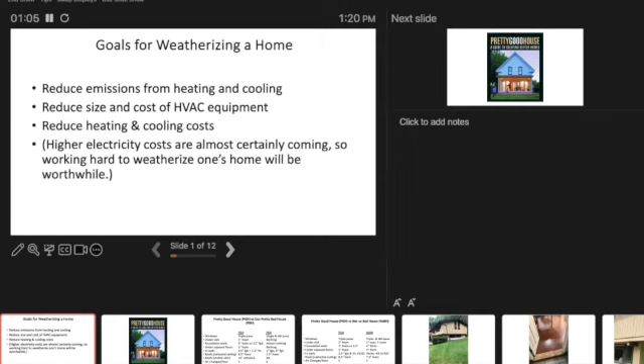If we can weatherize our home really well, before the transition from fossil fuels to electric, you reduce the size of the equipment you need and the cost of it. Great savings right there. Plus, you reduce your heating and cooling costs long term. So two really significant savings if you spend money up front to weatherize your home well. And higher electricity costs are almost certainly coming, so this is the right move.

So when I started thinking about this, I'd been following this stuff for a number of years, and I knew about the Pretty Good House group. There are builders in Maine working on finding ways to build better homes, especially with a focus on energy efficiency. They were familiar with the passive house standard, which is basically, in a strange way to say it, insulate your house so well you can heat it with a candle. I mean, it's not quite like that, but practically, they really, really insulate the house super well.

These guys and gals said, you know what, that's possible, but it gets really complicated and really expensive if you take it to that level. So if we pull back a little bit, how far back to where it stops making real sense to add insulation and put in fancy windows and so forth, how can we get almost that far for less money? So that was what I chose as my goal.

Okay, so here we've got the Pretty Good House column on the left, and then our Pretty Bad House. So they call for triple pane windows. We had all single pane on the lower level and good double panes on the upper level. Blessings on the people who left them before us. So those were good. Under the slab, nobody puts foam under slab until very recently. So of course we had nothing there.

Foundation walls, they call for 3 inches of foam or 3.5 inches of fiberglass. We had almost nothing in the foundation walls. Under exposed floors, deck houses, that's what we're in, a deck house. There's a 2-foot overhang all the way around the house. That's not insulated in deck houses. So in the wintertime, when you stand near an outside wall, your feet are cold as heck because just 3 inches below you is 0 degrees or whatever. So we had nothing, no insulation there.

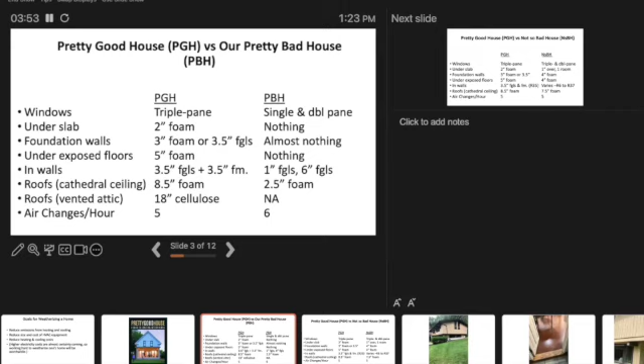Roofs call for 8.5 inches of foam in a modern home with a cathedral ceiling; we had about 2.5 inches. We don't have a vented attic, but they call for 18 inches of cellulose in that. Air changes per hour basically measures how many times an hour all the air in your house gets blown out by wind pressure and replaced, and you have to reheat it. A lot of houses are 10, 15, 20 times every hour, which is like 20 to 40% of your heating bill going out the window or through the walls. They call for 5, and we were at 6, which wasn't too bad.

So we jumped into this, and I found a really awesome guy down in Millis through a friend who'd been in this business for 40 years, and here's what he helped us do.

We got triple pane windows on the lower level and kept the double panes upstairs. Under the slab we couldn't get anything under it, but in one room we were able to do 1 inch of foam over it. Foundation walls got 4 inches of foam outside, since we were already doing drainage around the foundation. Under the exposed floors we got 4 inches of foam. In the walls it varies a lot - some walls we just couldn't access because of built-ins or bathroom tile, so some places still have the original 1 inch, but it's not much.

So we go all the way from that up to R37, where we basically meet or beat their requirement. We got 7.5 inches of foam, almost met their goal there, and brought our air changes per hour down to 5. So it really, really made a difference.

So windows - the lower level is all triple pane, upper level has good double panes. You don't see any air sealing here, but we did a lot of it. We didn't see that much change from 6 changes per hour to 5, and I think there's a reason for that inherent in the design of the deck houses, which I'm trying to do an experiment to prove. So we did as much as we could there, but air sealing is very, very important.

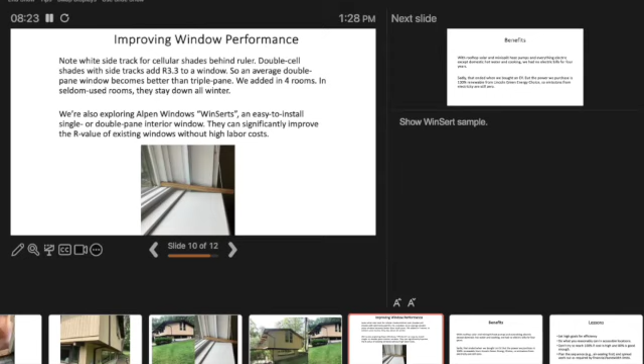Benefits: we put on rooftop solar at the same time, and put in mini split heat pumps, which are very efficient. So everything was electric except domestic hot water and cooking, and we had no electric bills for 4 years. That's a really nice benefit.

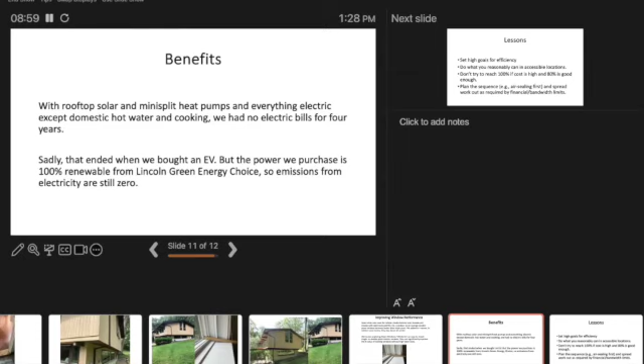Then we bought an EV, and sadly we had to pay electric bills again - it's just more than our solar collectors could handle. But the power we purchase is 100% renewable through Lincoln Green Energy Choice, so no emissions from that. Not paying any electric bills - I loved it.

Lessons: set high goals for efficiency when you're starting a process. Do what you reasonably can in accessible locations. Like I said, if you've got a wall that's tiled, you can't deal with everything from the outside - you live with that. Don't try to reach 100% if 80 or 90% is enough.

Plan the sequence carefully. Air sealing first, that's super important - if you start insulating, you've covered the areas you want to air seal and you won't be able to get to them. So air seal first, then spread out the work as required by financial and bandwidth limits.

It can go on for 10 years - you do it at your own pace. So there you have it.

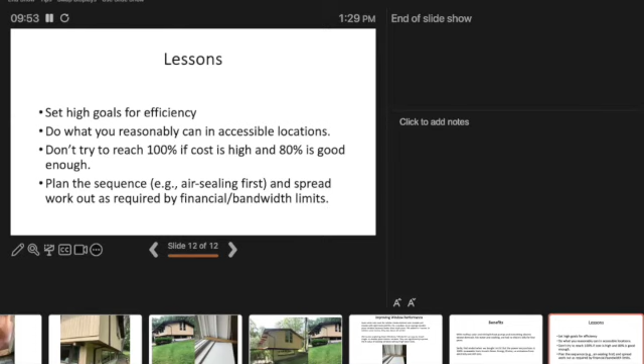I'm Tom Longnecker. I've been a Lincoln resident for 28 years. 26 years ago, I had the opportunity to move out of my mother-in-law's and build my own house in Lincoln, so I was pleased to start living in Lincoln on my own with a pretty good house, to make reference to Michael's new construction. Many of the things he said about sealing and so forth were given in my house from the start, but there were a lot of opportunities still ahead, so I'll go into those.

For us, what that meant was, of course, it was modeled after my 8th grade math class project where I designed a house, but it did have some other features. At the time I was starting a family, so we wanted to make our construction easy and meet our goals. We went with the Acorn Deck House Company because they could build a lot of the house in a factory and then bring it on site, making a really tightly sealed home, which we appreciated. It also keeps costs down and waste down - lots of benefits.

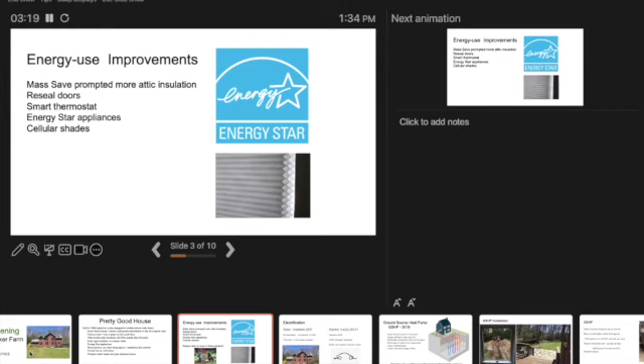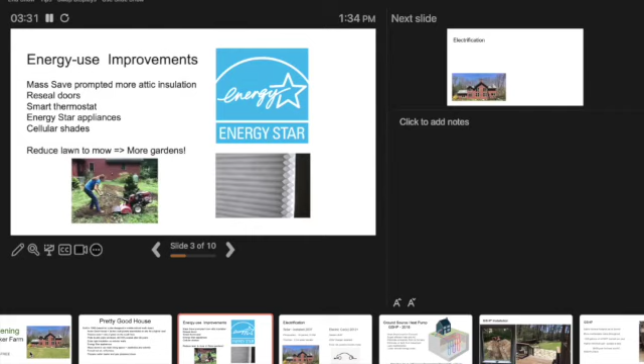And we, as one of our improvements, reduced the amount of lawn that we have to mow. So that's my wife digging up the lawn so we can put in a big garden in the back of the house instead of a lawn itself. Less mowing, we figured, was a step in the right direction.

But then we got into the serious stuff, the more expensive stuff. We realized electrification was a goal. In 2007, we installed solar. We were delighted when we did it. We got an 18-panel photovoltaic array with a capacity of 3.1 kilowatts, which for those of you who know the modern systems, that's not so impressive. But at the time, it resulted in some positives - we were not paying for electricity for a couple of years.

We also put in 3 thermal panels so that we preheated the hot water that went into our propane water heater, to reduce the amount of propane we use there. And the nice thing is they said that these systems do pay for themselves in time. So we've definitely paid for those systems, and now we're getting pretty cheap hot water and free electricity much of the time.

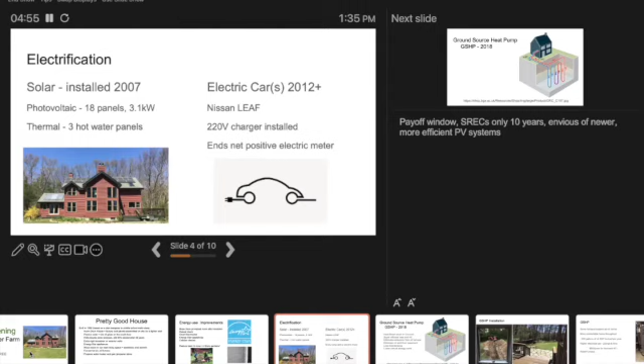Moving on with our electrification goals, we decided to drive electric. We bought a Nissan Leaf in 2012, and that allowed me to do all my commuting electrically. Love it. We installed a 220-volt charger in our home, so it was really convenient and fast to recharge as needed - overnight was no problem. But once we put the charger in our house, we never saw another net positive electric production. We are paying for electricity again.

The biggest improvement, I think, for us was when we anticipated that our 20-year-old furnace would be dying soon. We started doing some research. There was a HeatSmart event in Concord where we went and learned about the various options, like wood pellet stove heating systems and air source heat pump heating systems.

And we figured out ground source heat pumps work well for our property, partly because we already had the ducting for forced hot air. But I love the idea that in a ground source heat pump, none of the energy that you're putting into it is actually creating the heat. All the other systems you have to create the heat - we're just harvesting the heat from the ground. All of the energy that's required is just moving it around, pumps and fans. That sounded pretty super efficient.

I was skeptical when I first heard - could it really be that true, that it's that efficient? But results seem to be pretty good for us. Also love the idea that once we go to ground source heat pump, we are no longer burning any heating oil for our home. That was really appealing. One of the unexpected benefits was I don't need an oil tank in my workshop in the basement anymore - that was a lot of ground space I gained back from that. The whole system requires less maintenance than an oil system, certainly, and as advertised, we have lower costs for heating our home.

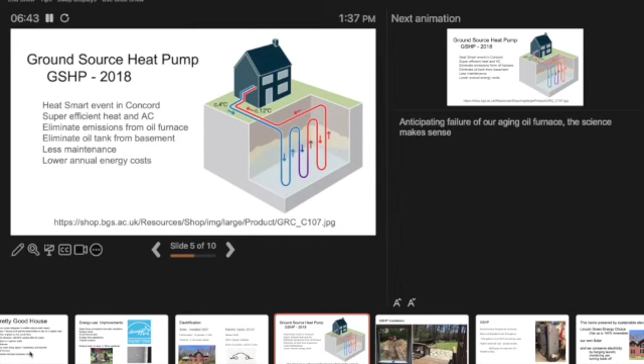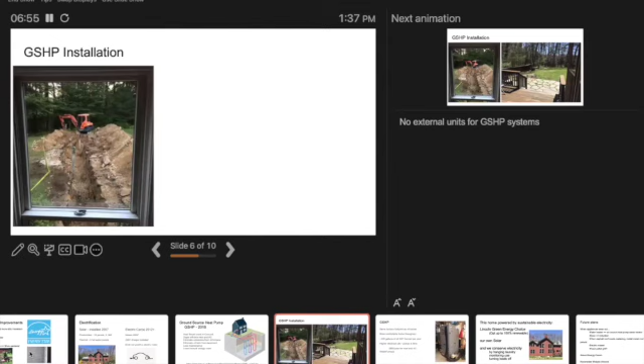Perhaps half as much as we originally paid. What I didn't anticipate in putting in a ground source heat pump was that they do have to drill some wells, so there was a major disruption to our front lawn at one point. But we saw the positives in that, and that led to some new landscaping, a new patio that we didn't have, and a change to our deck, and we are delighted with that.

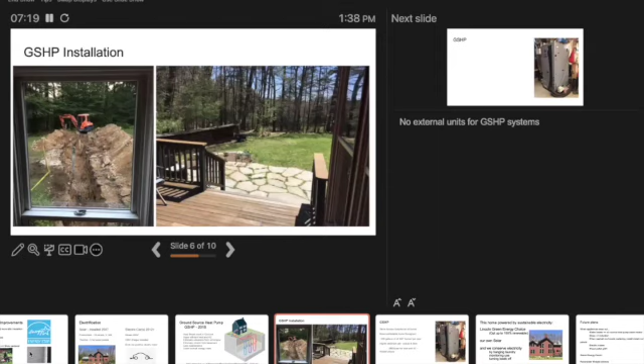The only exterior evidence of our heating system is our new landscaping. There are no other exterior systems like with air source heat pumps, where you can see something on the outside of the buildings typically, or even inside the buildings. None of that's visible for the ground source heat pump.

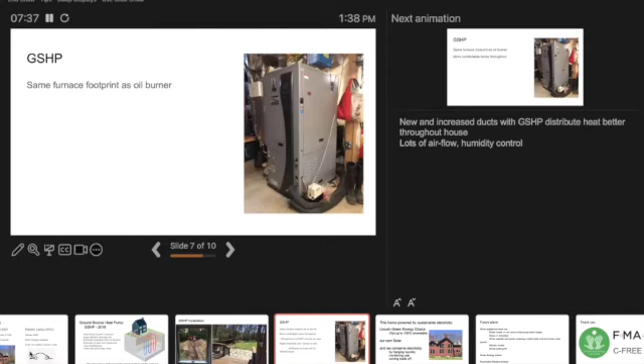Inside, this is now our WaterFurnace unit, which fits in the exact same footprint as the oil burner that we used for our system. So that was an easy trade out there.

Because of the engineering they did in planning for the system, they realized we needed more ducting in our basement to deliver the heat where it needs to be. As a result, all of our house is comfortable now instead of just some of it. They did a nice job with that, and I credit the engineering as much as the ground source heat pump for that.

The reality is for our house with the wood stove, we were burning about 400 gallons of oil a year to heat our home, which wasn't a lot, but when it's over $1,200 that we were paying at the time, it was something we would rather not do.

Instead of burning the oil, we were moving heat around. So we did see our electrical bills go up between the pumps in the ground source heat pump and the increased blowing of the hot air system. Our electrical bills did go up.

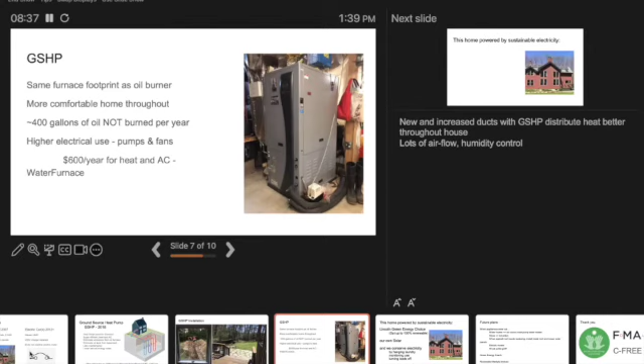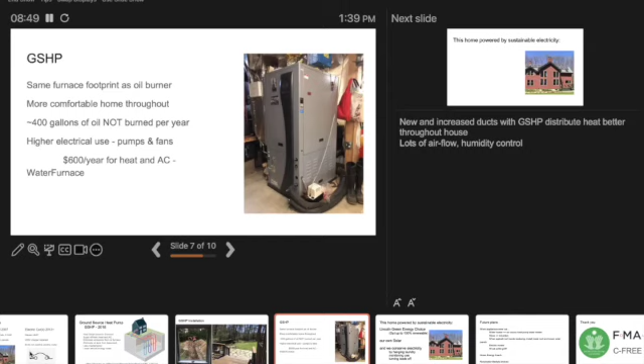We figure about $600 a year devoted to our heating system, but that is half of what we were paying for our oil each year. And it's not adding any emissions to the overall system. So we were very pleased with that.

And now we can say, both with our solar panels and the system we're using, we have a house that uses sustainable energy. We went with the Lincoln Green Energy Choice, 100% renewable. I encourage everyone to seriously consider that.

We have our own solar. I did look into whether we could get one of the newer, more efficient systems, and yes, of course, they would welcome our money for that. But I also got the recommendation that it's probably not worth taking down a functional system until you need a new roof, so we'll save on that replacement.

And we make efforts to conserve electricity, hang our laundry. We actually look at how much electricity our appliances draw, and we turn off loads. So there are basic things we're doing.

But we're not done, there's still more ahead. When our appliances wear out, we'll make sure that we replace them with efficient ones. What I'm looking forward to, when it's time to replace our propane water heater, we will go with a heat pump water heater, no question.

When we need to replace our gas stove, I'm looking forward to working with induction. I've tried it, I like it.

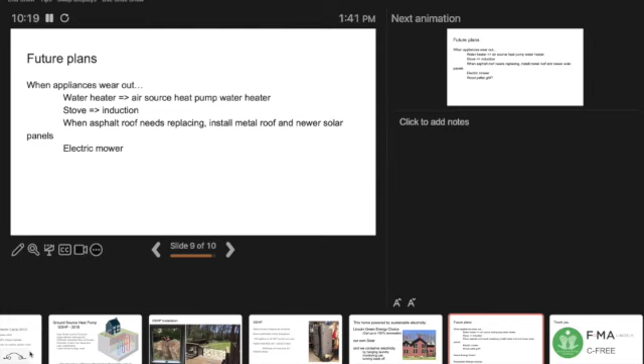When our asphalt roof dies, we're going to put on a metal edge roof that we won't have to replace again, and that makes it really easy to put the solar panels on. Someday, if I can collaborate with some neighbors, I'll buy an electric mower, maybe a wood pellet grill. We've got a lot of things to look forward to.